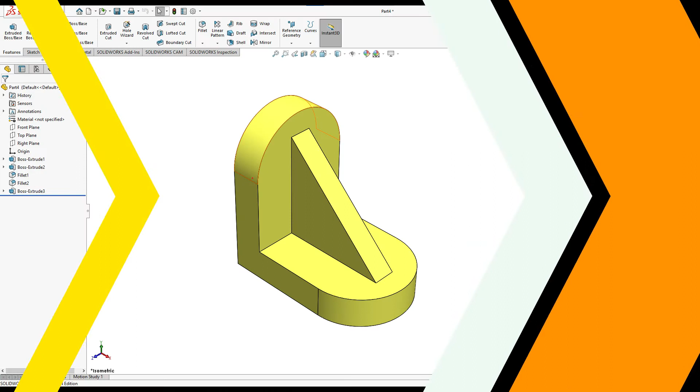Today we are going to draw a simple part. As you can see, it's very simple. So let's start. If you'd like, pause your video and ask yourself how to draw this, and then follow the following steps.

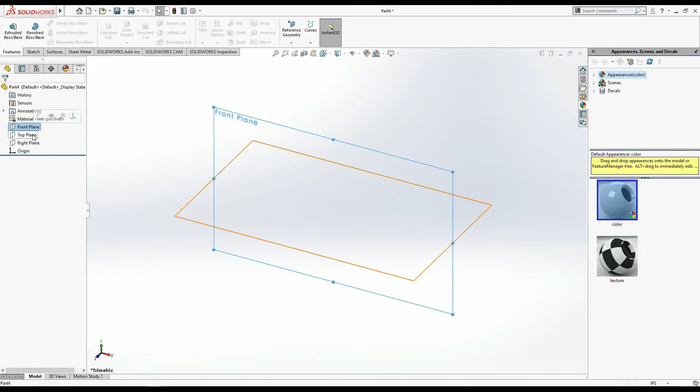First of all, go to new part. I am going to draw this in the top plane sketch. I have to draw a center rectangle from origin to here.

Using smart dimension, you can see this side is 38, and this side is 38 plus 38 by 2. This side is 38, this side is 38 plus 38 by 2, which is 57.

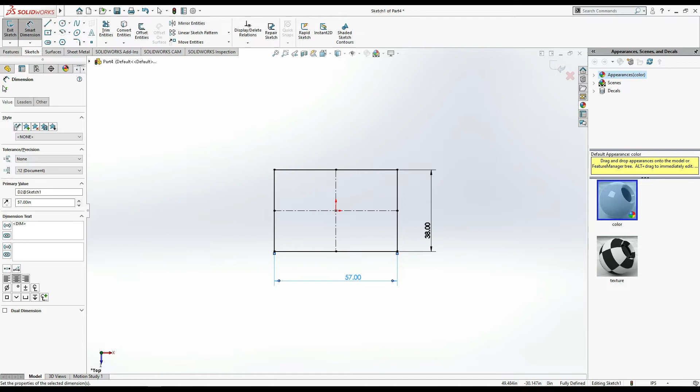Now, features extrude up to 11 inches. Features extrude up to 11.

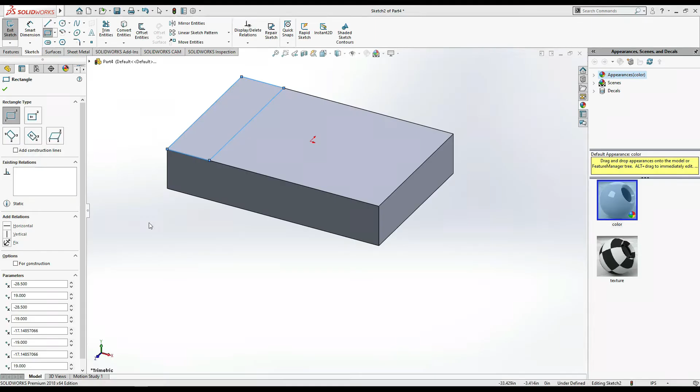Now select this face, sketch, select corner rectangle from this edge to this edge. This thickness is 11, so smart dimension: this side is 11.

Features extrude up to... you have extruded up to 57, so 57 minus 11. Why minus 11? Because we are extruding from this surface, lower by 11, we have to minus 11, so 57 minus 11 equals 46.

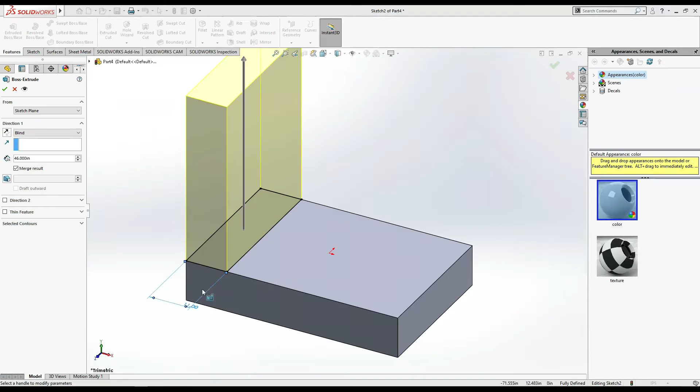Now you can see this side is filleted, so fillet of this stripe.

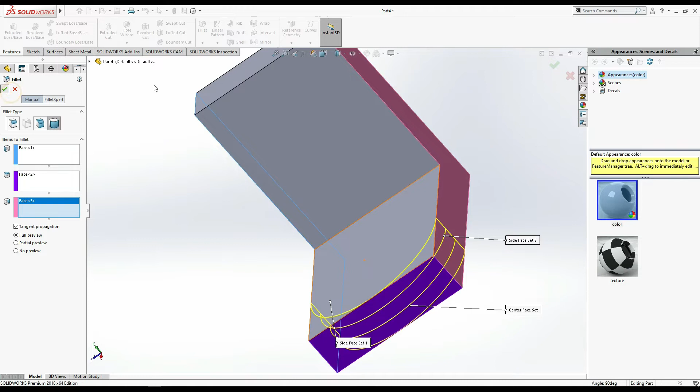Select this face for this, once more. For this, select this front face, this side face. Again go to fillet, select this face for the middle, this face, and for the end face, this face.

Now you can see it's done. Now you have to draw this one.

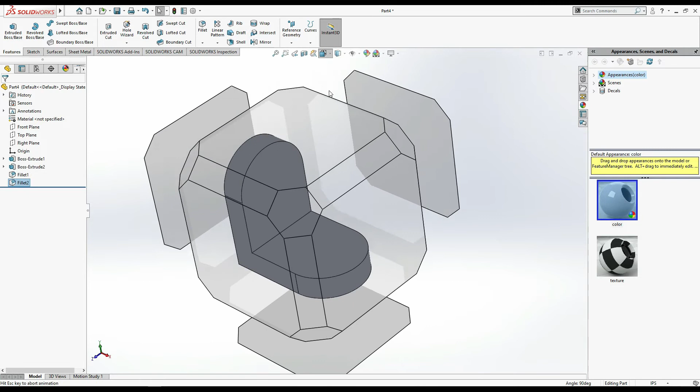Now find the middle plane. The front plane is at the mid, so front plane sketch, control 8.

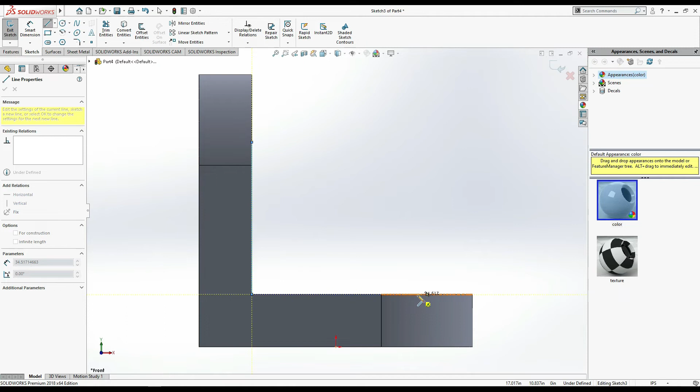Now select line from any point to this edge, then up to any distance, and this point, escape.

Now you can see it's showing 8 inches from this distance, and this distance is 8 inches, so smart dimension: from this point to top point, from this point to this point is 8 inches. From this point to here is 8 inches.

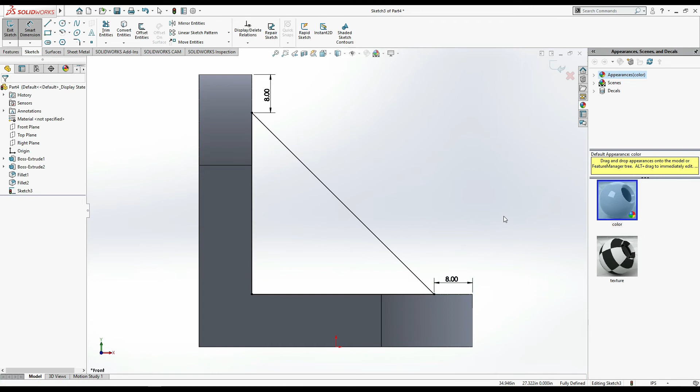Now you can see we have to extrude it up to 8 inches, so extrude boss base 8 inches, but you can see it's on the left side. What we have to do...

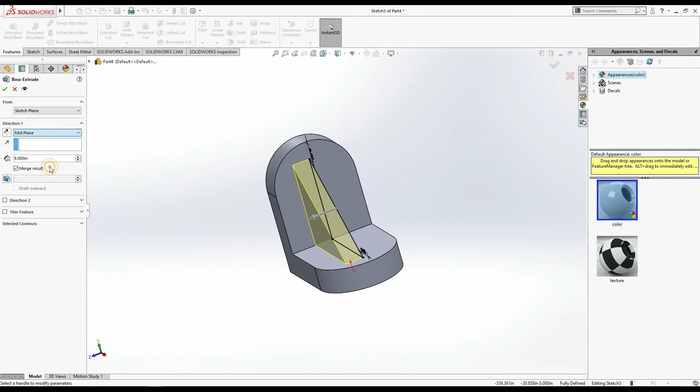You can understand this if you have watched my previous tutorials. We have to select mid plane. Now you can see it's done.

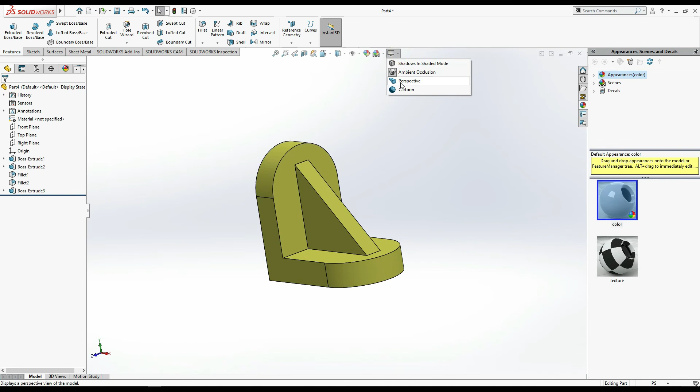As I have told you, it's very simple. Make some appearance if you want, this one. Or you can change its view, so it's ready.

Hope you guys can understand this tutorial. If you have any query, you can ask in the comment section.